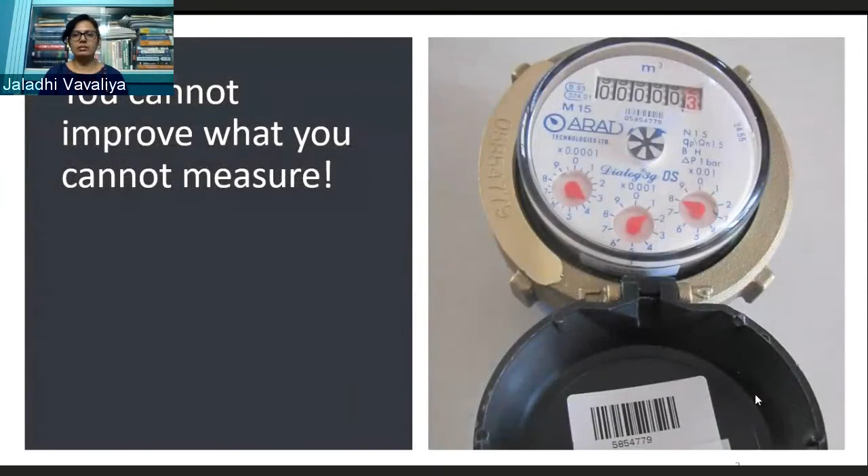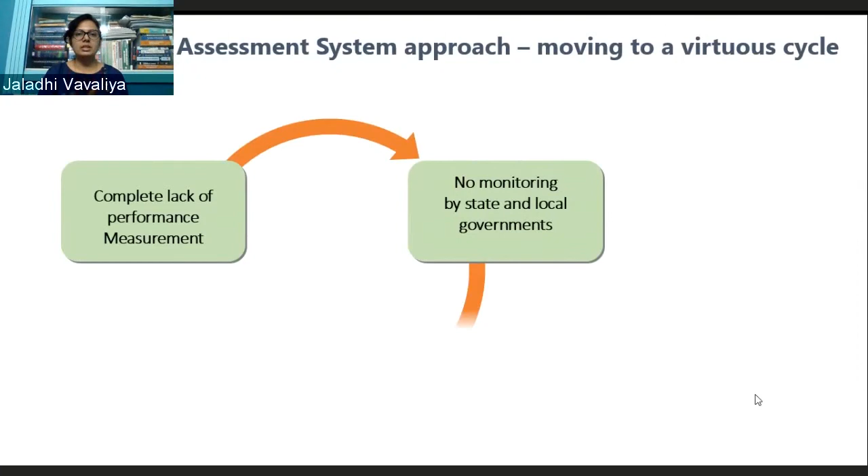So this is a management adage where you cannot improve what you cannot measure. The same is applicable for the water and sanitation sector also. If you don't measure the existing services in the cities, then you cannot improve. What is getting better or what is getting worse, you cannot judge. So in the performance assessment system, this is a vicious cycle, because there is no information available on performance. Monitoring at state and local level is not done, and then services deteriorate over a period of time.

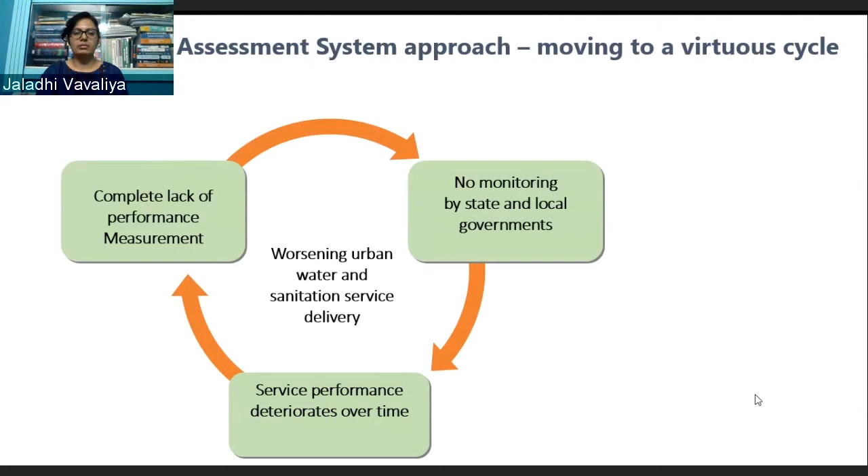Because of the lack of information, cities cannot measure the service level improvements due to infrastructure initiatives. So the performance measurement system approach is to establish a system with the use of technology, and then based on the information, decisions need to be taken.

Based on the data-driven decision-making process, you need to make plans and invest, not only in infrastructure, but in such a way that your service levels are improved. And then, to see how much services have improved because of the various initiatives, you again need to measure your performance. So this performance measurement, monitoring, and improvement is a cycle.

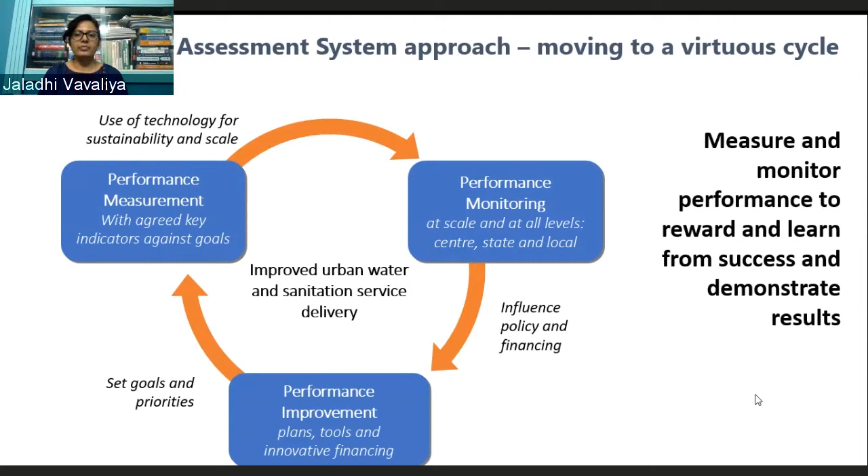We started developing an online system in 2011 with 2 states, Gujarat and Maharashtra. We cover all urban local bodies with support from the Government of Gujarat and Government of Maharashtra. This is also aligned with the national service level benchmark framework of the ministry. This module is also endorsed by the earlier Ministry of Urban Development, now the Ministry of Housing and Urban Affairs, which recommended states to use this online system.

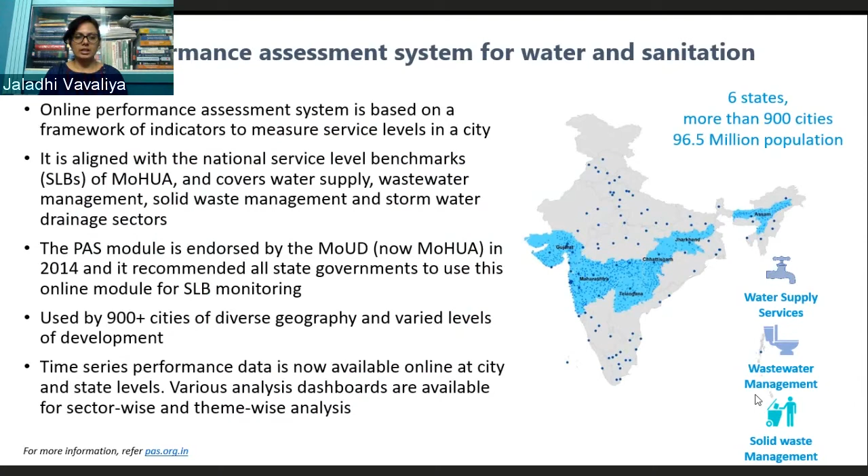Later on, the state governments of Chhattisgarh, Jharkhand, and Telangana have consistently used this information, and cities of Assam have used it for 1 year. So this has been used by 900 plus cities of diverse geography and varied levels of development. For Gujarat and Maharashtra, we now have 10 years of information available at city and state level, and various analysis dashboards are also available. For more information, you can refer to the pas.org.in website.

So in performance assessment, we have 5 main themes, and each sector is assessed on these 5 themes: access and coverage, equity in access to services, service level and quality, efficiency in service operation, and financial sustainability. There are 32 main key indicators across the themes, and for each indicator we have local action indicators, drill down indicators, which help cities identify improvement actions.

This framework is aligned with the Government of India's service level benchmark framework. In addition to SLB indicators, we have added aspects of equity, so access to water and sanitation services in slums, and performance of on-site sanitation systems.

In water supply, there are 9 main indicators across various themes. Today, the various case studies will be based on efficiency in service operations. Efficiency is measured through extent of metering of water supply connections, extent of non-revenue water, customer complaint redressal, and collection of water supply charges. So the various case studies are grouped into these aspects.

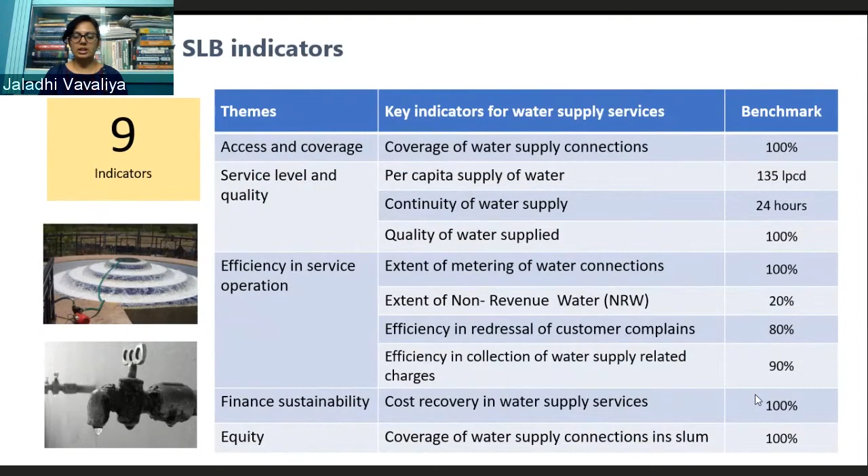So in the online system, cities enter information based on the raw data available in various hard copies or in an online system, and then that information is processed, indicators are calculated, and various reports are generated at city level and state level.

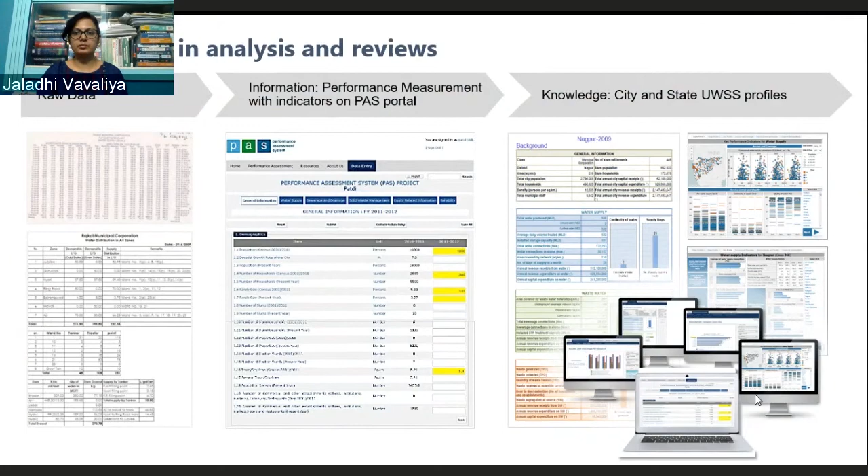So based on this information, we have assessed the metering at various locations, metering by using water meters. We have found out that out of 850 plus cities, only 196 cities are metering at source and treatment plants. So there is an absolute lack of bulk meters at source, treatment plant, and distribution stations.

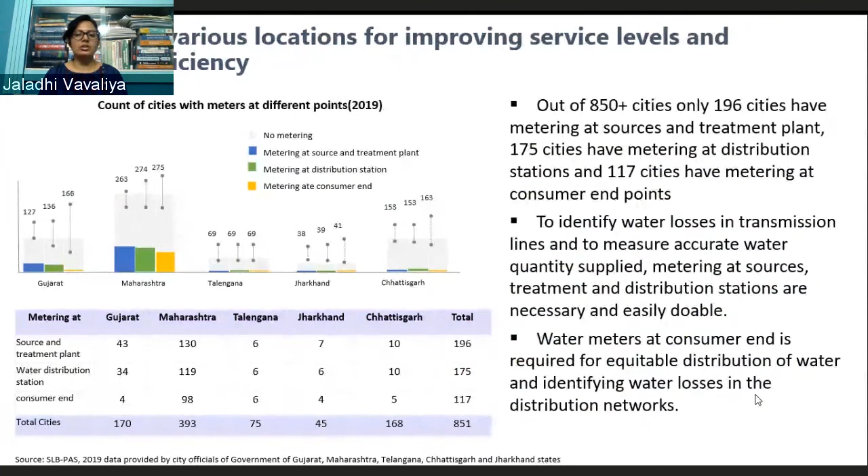And when we go down in the service chain at the consumer end, only around 100 cities have consumer end meters. So I think aspects of metering are very important. With the use of meters, cities can identify water losses in the transmission line. And if it's installed at the consumer end, it will help in providing equitable distribution of water, and also help in identifying water losses in the distribution network.

So the second aspect is non-revenue water. This non-revenue water is also a thrust area for improvement in the water sector. And this reform is also part of the AMRUT scheme. And under smart cities, cities use various smart solutions for leak identification and preventive maintenance.

So non-revenue water includes 3 components. When we say non-revenue water, people think it's leakages, but along with losses and leakages, it also includes free supply, and then come apparent losses, which is like illegal consumption, or if a city is charging based on the water meters, then inaccuracy in the water meters.

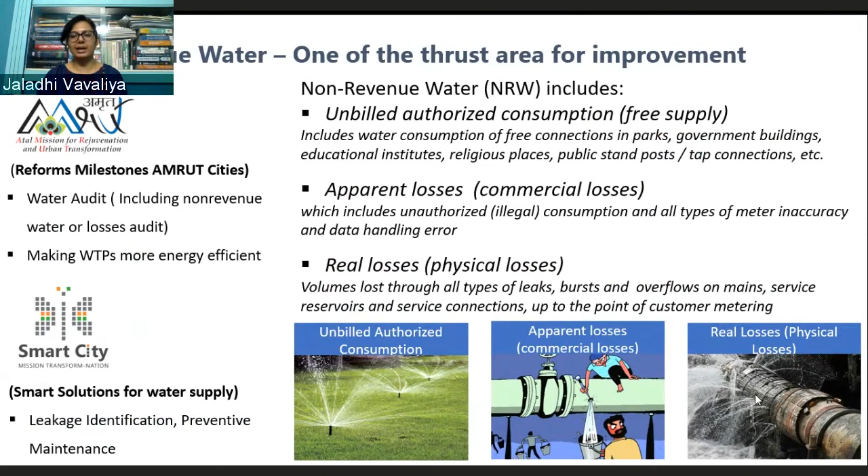So non-revenue water has three components. Unbilled water, which is free supply provided in parks, government buildings, education institutes, through public stand posts and tap connections. Apparent losses is meter inaccuracy and illegal connections and consumption. And real losses is physical losses through the pipelines, valves, storage tanks.

So how can we reduce the NRW? To reduce the NRW, we need to know how much water is being lost, where it is being lost, and why it is being lost. And based on these three questions, strategies can be introduced. So one needs to do a cost benefit analysis. If this much water will be saved, then what investments are required, what will be the return on this investment, and how we can maintain the system and sustain the achievement we have gained.

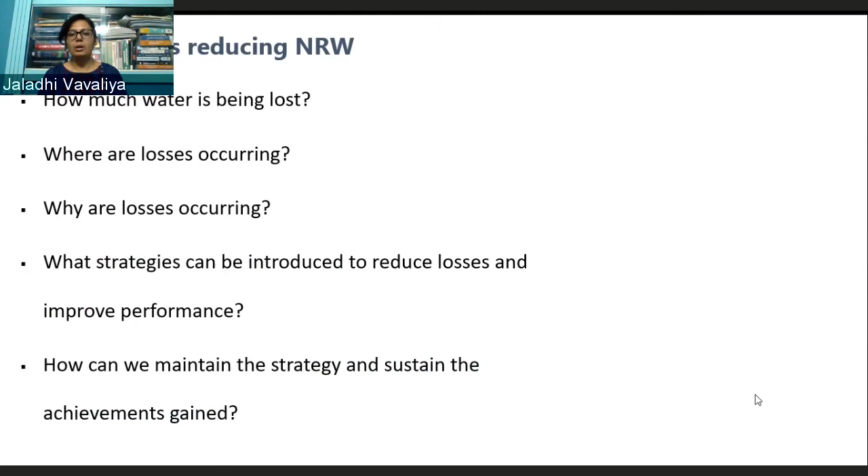So it's not like, okay, one time we have reduced the NRW, so it will stay a constant NRW. We need to sustain these achievement targets also, as over time pipeline networks will get old, and there will be more leakages and more losses. So to improve efficiency, water audit and energy audit studies are required. Based on these results, we need to do leak detection, estimate the water quantity, and measure the water quantity lost in the transmission line and distribution line.

There is also a linkage between water losses and pressure management. If your pipes are leaking heavily, it will reduce your pressure, and at the consumer end, people will receive less quantity of water with less pressure. So losses and pressure are aligned together. And to regularly monitor the water losses, cities need to install bulk meters at various sources, treatment plants and distribution stations, and install consumer end meters.

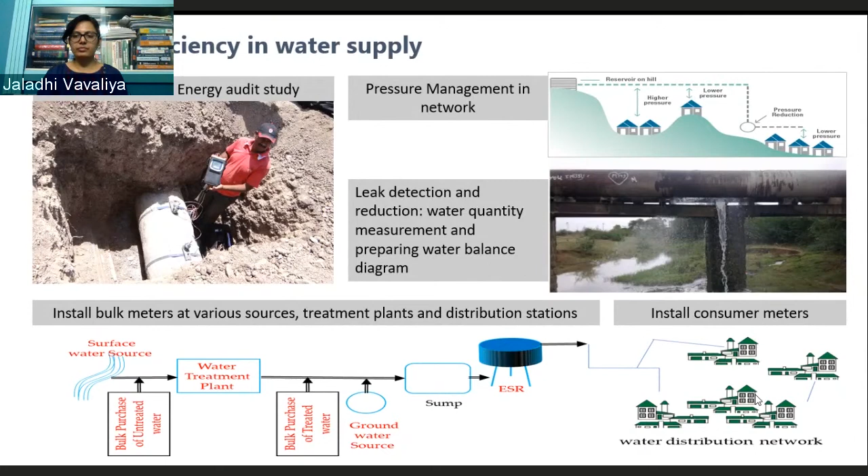Now I will present various city case studies, how they have measured NRW, and based on the values, have taken various initiatives to improve efficiency. We have done a preliminary water audit exercise in selected cities of Gujarat, and we found NRW values varying from 35% to 77%. Because of the lack of metering at various levels, they just report NRW as 20 to 25%. But actually, when we do the measurement, the values are very high.

So we have developed a simple methodology to measure the NRW. The steps are written here. First, do preliminary visits and identify the various field measurement points. Then we cover all the measurements. Water supply sources, treatment plants, and distribution stations are measured with portable flow meters. At the consumer end, we installed temporary water meters and measured the water quantity for full supply hours in a day. Based on this measurement, we estimated the NRW value.

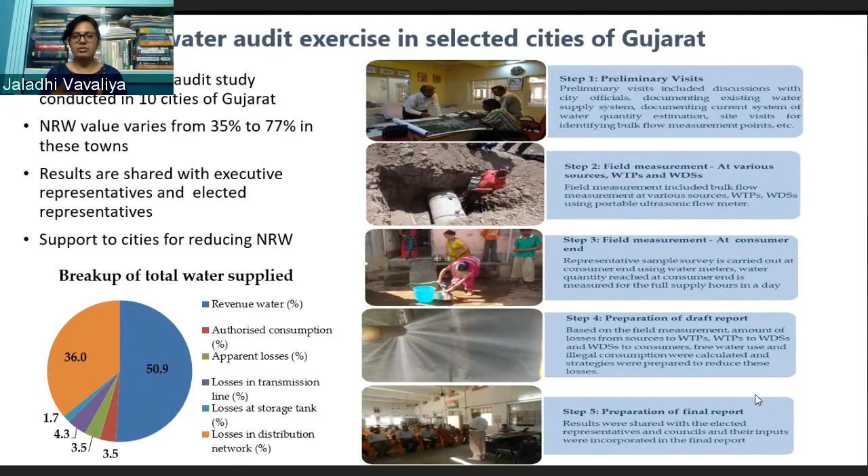So these losses, transmission line losses, can be easily identified and repaired. And based on this exercise, we have prepared a strategy for NRW reduction. So if we look at the water balance diagram, there is unbilled authorized consumption, apparent losses, and free supply. So when you reduce these losses, it will increase your revenue. And how can you reduce these losses?

There are various ways. Free supply needs to be monitored, and only a certain quantity needs to be supplied free. When you supply free, people will not value the water, and they tend to use it freely, so wastage at the consumer end will happen. So to use water judiciously, we need to monitor the free supply. We also need to identify and regularize illegal connections and prepare a meter checking and replacement plan.

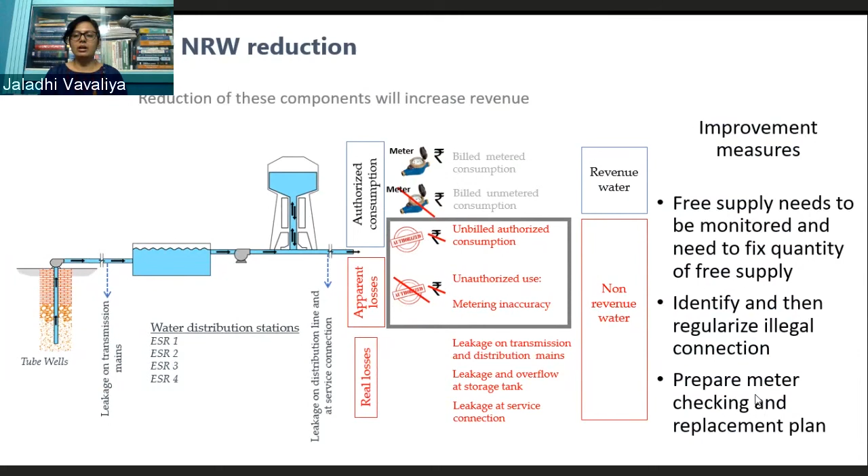Many a time cities have water meters, but half of the meters are not working, or the meter checking and replacement plan has not been prepared, so they are not aware of their accuracy. So they need to start a meter checking and replacement plan.

If we look at the real losses, there is leakage in transmission and distribution lines, leakage and overflow at storage tanks, and at the service connections. When you reduce this quantity, it will reduce your expenditure and increase revenue if water is supplied through volumetric charges. Because reducing this will increase your pressure head, and you need to pump less water. So if you reduce real losses, your energy expenditure will also be reduced.

And for improvement measures, you need to repair leaking valves. During my field visits, I have seen many valves leaking. The quantity from these leaking valves is small, but they leak 24 hours. So when we sum up the quantity of all leaking valves, it's like 3 to 4% of total NRW loss. So we need to repair leaking valves and replace leaking pipelines.

And for overflow of storage tanks, we need to create awareness among staff also. And the most difficult part is repairing service connections. So cities need to start checking the service connections step-by-step or ward-by-ward, and poor quality connections need to be replaced.

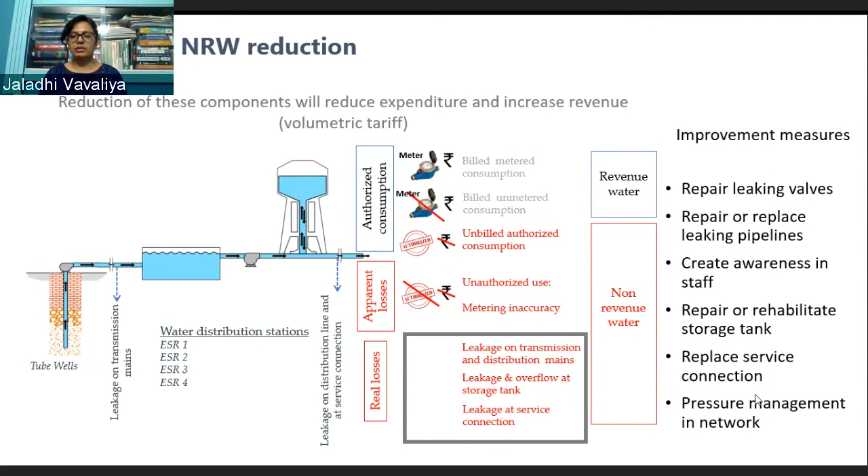Rajkot is a city in Gujarat. When we did the preliminary water audit, we found high losses in the main transmission line, and there was no accountability of water losses due to lack of metering. So the city installed a real-time water loss monitoring system. They installed water meters, pressure sensors, and water level transmitters. These regularly send readings to a centralized computer, and based on the quantity calculation, it gives the loss quantity, like which pipeline has the highest losses.

After installing this system, they found many illegal connections taken directly from the transmission line. Usually water supply connections are given from the distribution network, but people took connections directly from the transmission line, which runs water 24 hours. This city supplies water for only 20 minutes. So some people enjoyed the benefit of 24 by 7 water supply, while people with legal connections had only 20 minutes of supply. So the city reduced the illegal connections, reduced the losses in transmission lines, and replaced the leaking pipelines also.

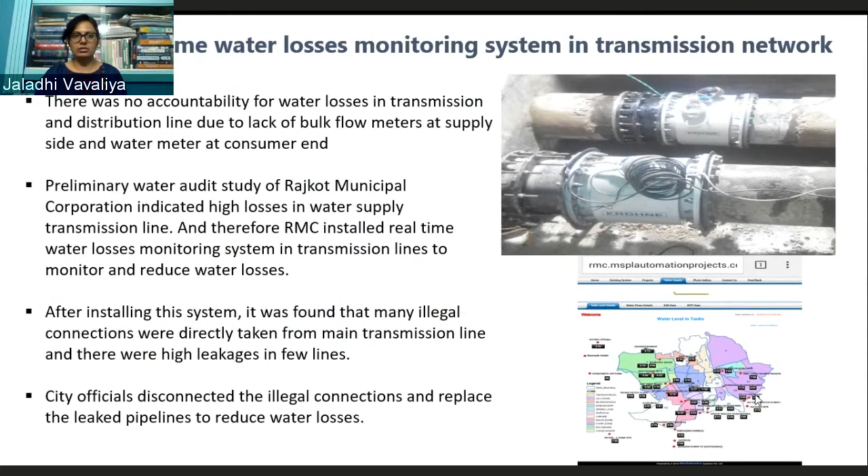Then Surat. Surat has taken various initiatives, not only in terms of NRW, but also energy efficiency and establishing standard operation and maintenance practices. Surat initially, in 2009-10, formed a non-revenue water cell, an NRW cell, in the corporation. Based on the complaints received, this cell started mapping leakages on the map. So whenever a complaint was received, they started monitoring which area and pipeline it came from.

They repair that pipeline and also record it on the map. When the next complaint from the same area comes, they again record it. So based on the complaint database, they prepared a leak map, and based on this map they replace leaking pipelines, and they were able to reduce leakage complaints by 30% in all zones. Because of this, they also avoided frequent digging of roads and improved water distribution efficiency.

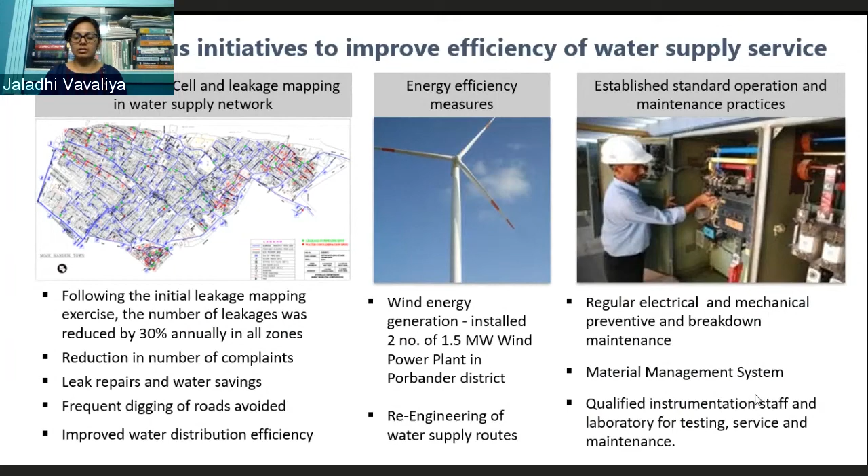Navi Mumbai. Most of the cities, when they talk about e-governance systems, most of the time it's from the government-to-citizens aspect. But for the internal management and internal operations of water supply services, only a few cities have an e-governance system for internal operations of water and sanitation services. Navi Mumbai is one of them.

From the source, they have the Morbe dam. From there to the water consumer line, they have installed bulk flow meters at various points, and at the consumer end there are water meters. All the systems are SCADA-based, and from the bulk supply point of view, for production, treatment and distribution, hourly reports are generated at the centralized level. They are also analyzed, and if there are high losses, they report to the engineers.

For water consumption, they have automated meter reading systems monthly. So instead of manual recording, the meter reading is done automatically at the monthly level. Through a centralized laboratory, they also do water quality tests, and all these are computerized in the e-governance system. There are multiple mechanisms to register complaints, through telephone and online, and whether each complaint is redressed or not, the redressal time is also recorded in the complaint module. So Navi Mumbai has an internal system for operation and maintenance of water systems.

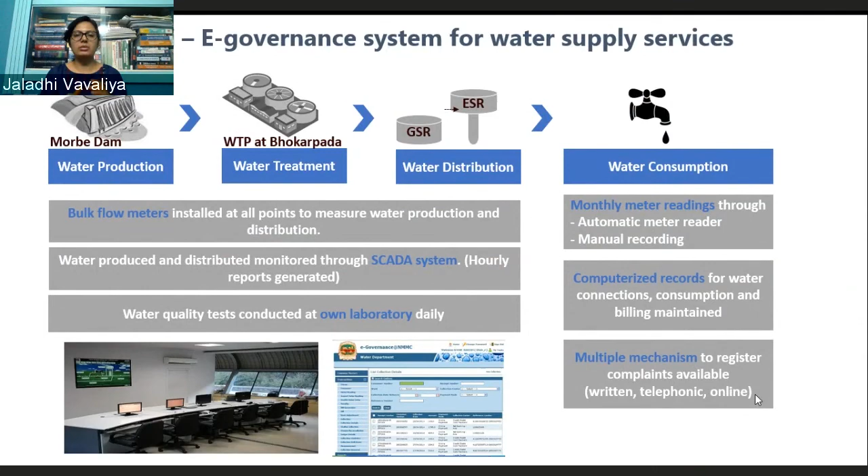Then the last case is Malkapur. Malkapur is a Nagar Panchayat in Maharashtra, which has supplied 24/7 water supply since 2010 in the entire city. We have pilots in some areas of some cities, for example Nagpur, Amravati, or Hubli-Dharwad. Malkapur being a small city, they have the advantage of smaller cities, and they have covered the entire city with 24/7 water supply services. The main factor is strong political and administrative will. Because of that, they have been able to achieve 24/7 water supply services.

During the project implementation phase itself, tremendous citizen awareness was done, and all the citizens' points of view were taken into the project formulation stage. So the awareness generation drive is a key component of their success.

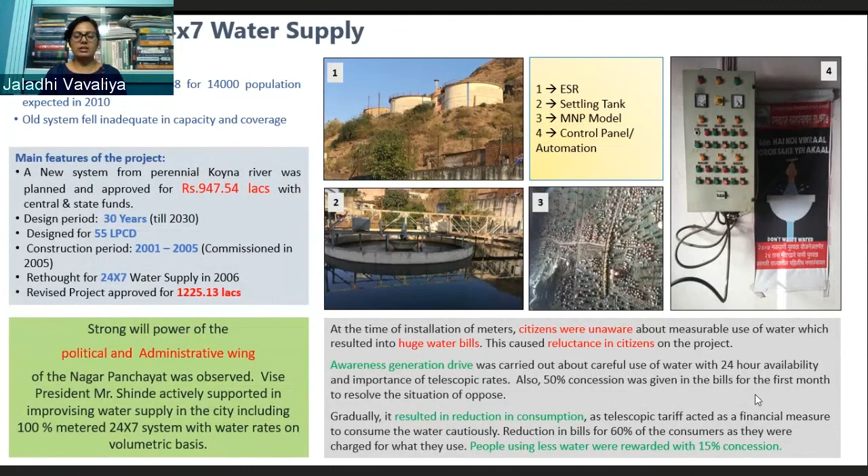In Malkapur, they've used MDPE pipeline, which is a single-length pipeline, and connections have been done through the PE tapping system. Only qualified plumbers can do these connections, and they have given connections to all the consumers. So it's 100% water supply. All citizens are connected to the water supply network, and there are no illegal connections in the city. They have an automated meter reading system.

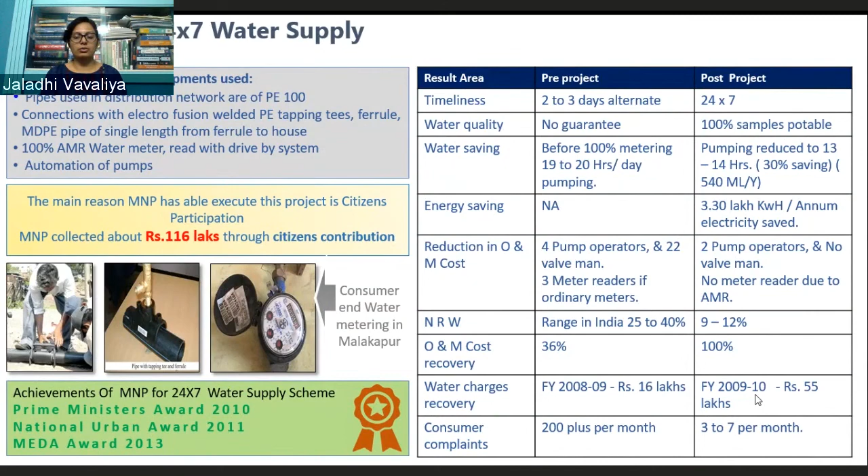So instead of manual water meter reading, the monthly water quantity used is captured through wireless services. Because of this, they have reduced energy expenditure and reduced operation and maintenance costs. The NRW was high, around 25 to 40%. Now they're able to achieve NRW of 9 to 12%. Because of that, cost recovery has also improved, and they now receive fewer complaints.

Besides this water online system, we also have various tools for planning and monitoring. These tools are like the performance improvement plan or SANI plan tool, which helps a city or consultant make a feasible plan. Instead of only infrastructure-oriented, this is a service-oriented plan, and it also gives projections like how much finance it will take, whether based on the ULB's financial capacity they will be able to sustain the O&M expenditure or not, and how much tariff they need to levy. So this is a very comprehensive plan.

We have also developed an integrated fecal sludge and septage management toolkit. We have a target setting model: if you have a current existing infrastructure plan, how much your service level will be improved. Based on your previous service level information, it will also project that next year, if you don't do any projects, this will be your service level. Then the tariff setting model shows how much tariff you need to levy to cover 100% cost recovery.